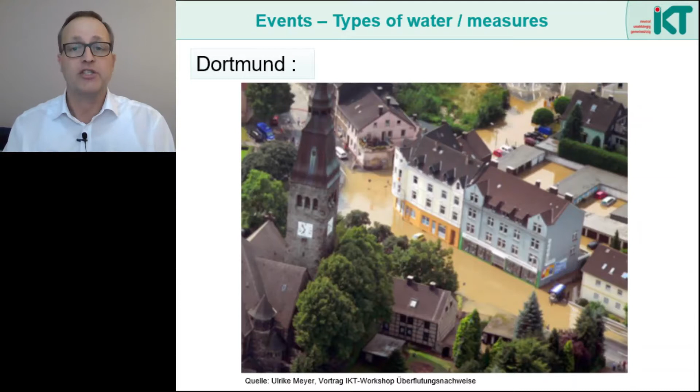From this, the Urban Drainage Department drew its conclusions and launched a major information campaign to inform citizens on the subject of backwater and property protection. This included citizens' events, flyers, and also explanatory videos in which the topic of backwater and backwater protection is explained in detail.

The conclusion here for us is, even though everyone was talking about floods and inundation, the event was in many areas just a backwater event. So a normal operating case that, with the right technical means, does not have to lead to major damage.

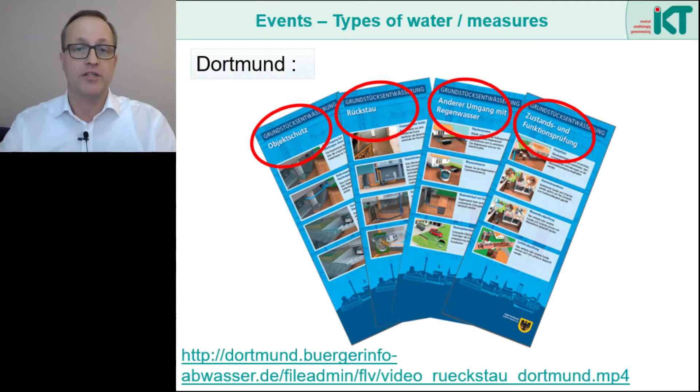The situation was different in the city of Münster. In 2014, heavy rain fell here with an intensity that had not been measured in Germany before. In 7 hours, almost 300 millimeters of precipitation fell in one part of the city, while other districts were hardly or not at all affected.

A thunderstorm cell had settled in windless conditions and rained over a single part of the city. A few hours later, another thunderstorm cell followed, which again rained over the same part of the city. All in all, this was an extremely rare event that caused considerable damage.

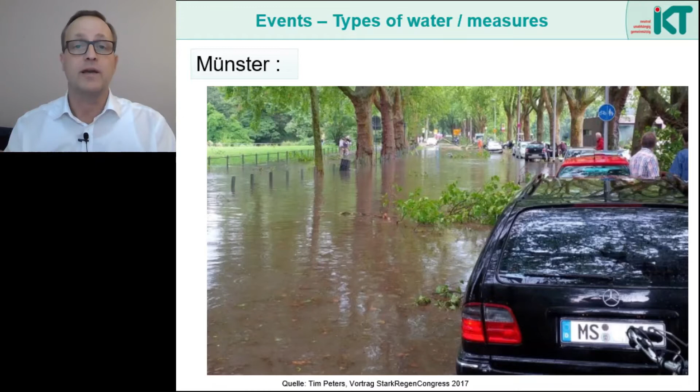In this case, the affected part of the city received far more rain than any underground drainage system is designed to take. The streets were flooded, and the water also carried branches and other floating debris, which then blocked roads and paths. In such a case, the drainage system cannot solve the problem of flooding. However, it must still perform its task reliably and not become an additional problem itself.

We can see an example in this picture. Such a passage barrier in a drainage ditch also unintentionally acts like a screen. If during a heavy rainfall event branches and other debris are carried along by the water masses, they are held back here and the drainage cross-section is blocked.

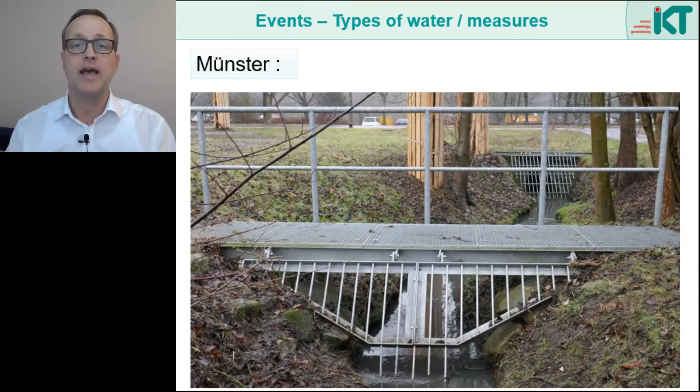Eventually the system fails and backwater occurs. In the city of Münster, such passage barriers were therefore later dismantled and replaced by fencing around the site.

Here we see another case, again with a different water management background. The small town of Braunsbach in Baden-Württemberg was overrun by a wave of mud. The water was up to the second floor of the houses. There had been extreme rain in this mountainous region. There was also a period of calm winds, so the rain fell over a long period of time in a

single area. Then the water flowed down the hillside and followed two small streams that converged in the town of Braunsbach. In addition, there were landslides, so that earth dams formed in the streams, which later suddenly collapsed under the water pressure. Large masses of water then flowed into the town at high velocities and with a lot of debris and rubble.

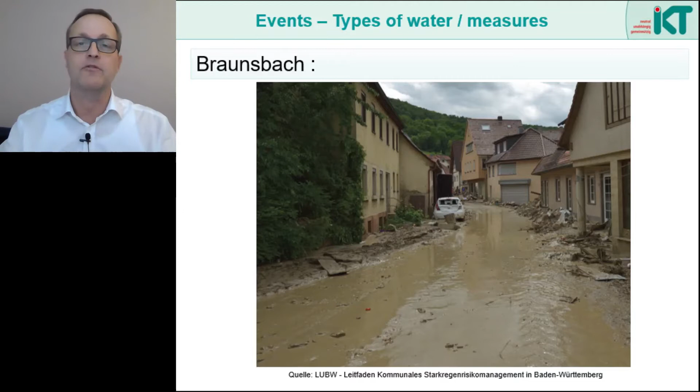Here we see the result in a different place. So here it was not the rain in the town itself that became a problem, but the water flowing in from other areas outside the town.

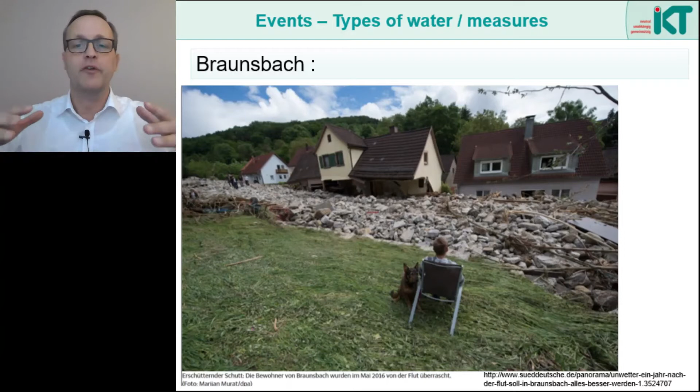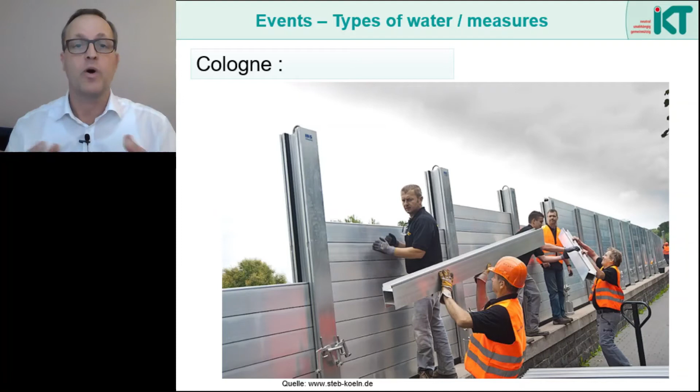The last example comes from Cologne, also in Germany. Cologne is located on the Rhine, one of the largest rivers in Europe. Here, flood protection is of great importance. In this picture, we see how a mobile flood protection wall is being built. In the past, Cologne was often affected by floods that inundated large parts of the city area. So during floods, a large river overflows its banks. The water then comes from the entire catchment area of the river.

Let me now systematize these examples a little. Usually we speak of an overload of the system when the sewage system can no longer carry away the rainwater. It is usually expected that frequent rainfalls and the dirt washed off with them can be cleaned safely. So the main purpose of the sewer system is to ensure that frequently occurring polluted water is disposed of properly. It is all about the quality of water.

In most cases, we are talking about return periods or recurrence periods X of a few years. Of course, the system has to function perfectly from a technical point of view. We remember the example from Dortmund, where the private connection pipes were not secured against backwater and the basements were flooded as a result. Flooding, in turn, means that the water causes damage on the surface. Here, the still acceptable return times Y are then significantly higher.

The precipitation covers different areas before it runs off on the surface. These can be unsealed or sealed surfaces, such as pavements or roads that lie within the area under consideration. In addition, however, rainwater can also be received from surfaces outside the area under consideration.

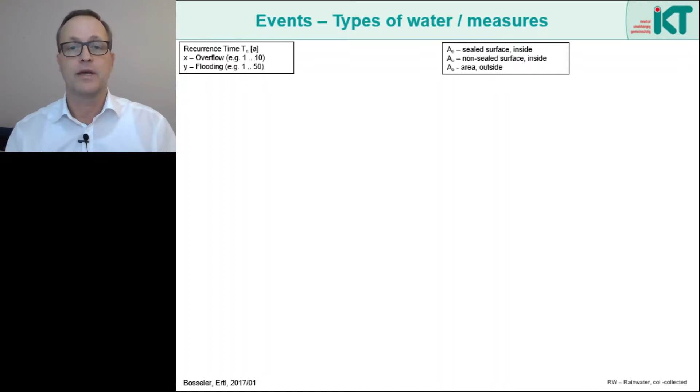The rainwater that occurs very frequently is then normally classified as wastewater. This is then collected separately or together with the used water. So the issue of quality is in the focus here. Some rainwater is also treated decentrally and can be infiltrated directly into the groundwater.

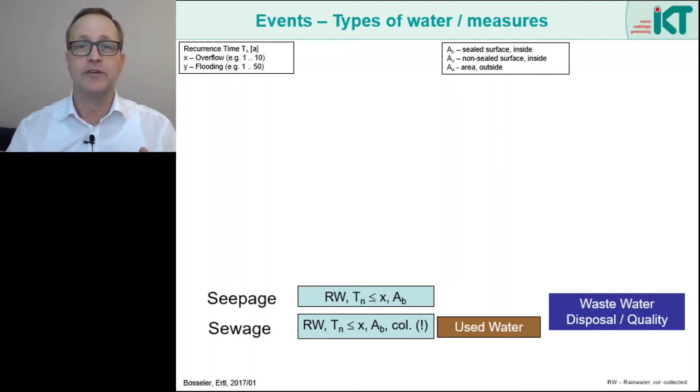In addition, there are also many other groundwater issues, but they are only listed here for the sake of completeness. For example, wastewater can exfiltrate from the leaking sewers, or groundwater can infiltrate into the sewers as extraneous water. But we want to look at rainwater here.

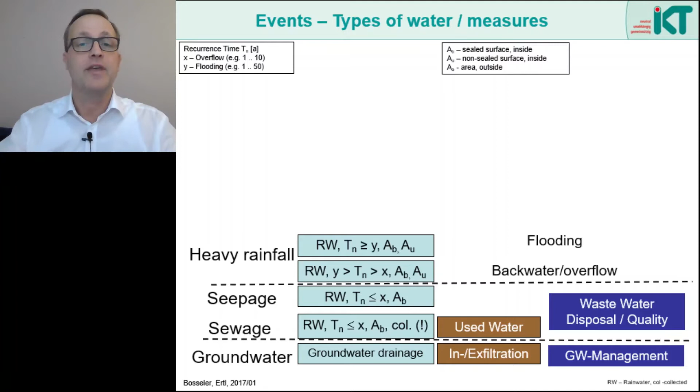After all, according to plan, infrequent, heavy rainfall is no longer collected and drained in the sewage system. As a result, the sewage system can become overloaded and result in an overflow. Or, in even fewer cases, the area may be flooded. The main problem here is that we are talking about very large masses of water that can definitely no longer be discharged via the sewer. We have seen this in the case of the city of Münster.

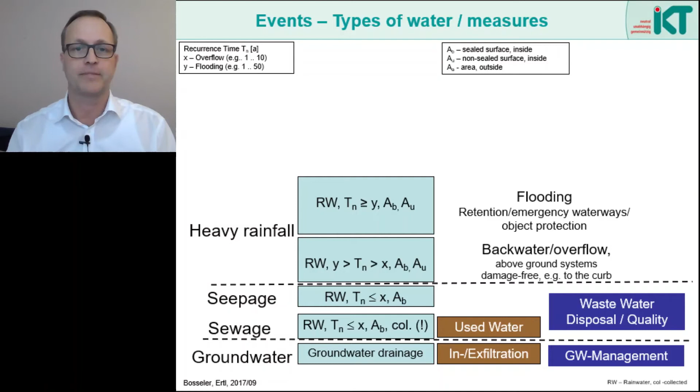Other measures are needed here. This applies in particular to the construction of above-ground systems for control, retention, and also the protection of objects. In addition, further measures are necessary in special cases. This concerns the construction of barriers, retention and guidance elements to prevent water from other areas from entering. We remember the example of the small town of Braunsbach.

Or, of course, the protection against floods from a large body of water, such as the Rhine in Cologne. All these tasks are about runoff and flow management. That means primarily a question of quantity. We need to know how to retain and steer large amounts of water so that they do not cause damage.

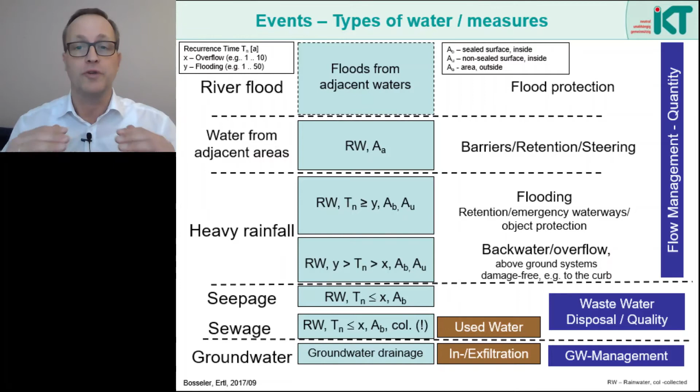Let me summarize once again. The sewerage system serves to solve the quality issue. That means, how can we treat the pollutants that occur during frequent rainfall? The quantity issue then concerns the very infrequent but heavier rainfall. Here it is a question of controlling the heavy rainfall on the surface through suitable retention and control measures so that no damage occurs. Now, this brings me to my second point.

How do we deal with this situation now? What positions are there and who is responsible at the municipal level, purely legally, and what is technically appropriate? Here it is worth taking a look at the European standard on urban drainage. 3 levels are distinguished: the water management system, the urban drainage system, and the actual drain and sewer system, that is, the system of wastewater pipes. There are then different responsibilities for the different levels, namely for water associations, municipalities, and the wastewater companies.

How the individual levels are interrelated is summarized in section 5.2.1 of the standard. Quote, drain and sewer systems are part of the urban drainage system. Urban drainage systems comprise all infrastructures for the management of wastewater and rainwater in the built environment. The extent and role of the drain and sewer system within the urban drainage system depends on local circumstances for each system. Urban drainage systems are part of a wider system of water management.

The urban drainage system is then explicitly defined in section 3.17 as infrastructure for the management of wastewater and runoff in the built environment. In essence, all this corresponds to our classification of the different types of water. Wastewater is a quality issue, and this is solved by the wastewater company. The municipality, on the other hand, is responsible for all flooding issues that arise on its territory. Water associations, on the other hand, take care of high-level regional water issues that have to be solved in the river basin as a whole, for example.

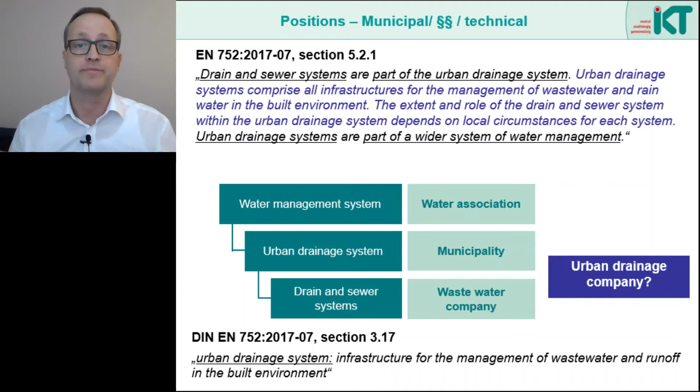In the public perception, however, this distinction is not always clear. This is especially true when the wastewater company calls itself the urban drainage company. In this case, citizens naturally assume that an urban drainage company is actually responsible for urban drainage, and so also for surface runoff. However, this is precisely not what a wastewater company does. Against this background, 5 guiding principles for the role of urban drainage companies were formulated by KomNet Abwasser in Germany. KomNet Abwasser is a network of more than 60 municipal network operators organized by the IKT, in which the IKT offers a wide range of services, including on the topic of heavy rainfall.

So, the guiding principles are: number 1, the sewer is part of the drainage system. The sewer serves to collect polluted water, that means also frequent rain runoff from paved areas, in order to convey it to a purification system. In addition, other facilities must be provided on the surface to cope with infrequent but all the more heavy rainfall.

Number 2, the sewer function must be safeguarded, especially during weather extremes. The sewage system cannot solve the heavy rain problem, but it must not become an additional problem itself. We remember the example from Münster, where some passage barriers in the system acted as screens and were blocked with branches and floating debris.

Number 3, of course, the urban drainage company is a key player when it comes to assessing the heavy rain problem. Even if it does not plan, finance, and implement all the measures on the surface, it can, of course, support the municipality in the performance of its tasks.

Then number 4, this support of the municipality includes, for example, identifying risks. Based on hydrological and hydraulic calculations, risk areas can be identified and also solutions to manage and direct the water flow. Yes, and finally, citizen information. This task concerns in particular education about the necessity and possible measures for object protection on private property.

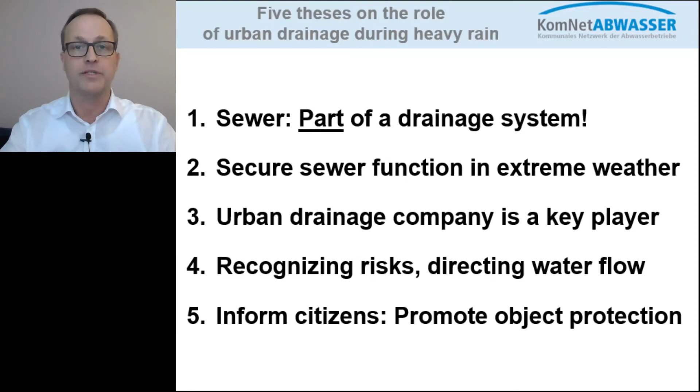Another interesting aspect is the information provided to politicians. Heavy rainfall events are often discussed together with the topic of climate change. Many municipalities have even committed themselves to the Paris Agreement. And that's where it's worth asking: what does the Paris Agreement mean in detail? Let's look at the most important article of the Paris Agreement, which is Article 2.

There, under A, we find the goal that is most discussed in public, which is to limit the rise in temperature. Now, as an individual municipality and an individual urban drainage company, we can, of course, only make a small contribution to this. More interesting is point B. There it says, increasing the ability to adapt to the adverse impacts of climate change and foster climate resilience.

And this, of course, relates precisely to the municipal measures for heavy rainfall protection that we have just been talking about. Precautionary measures against heavy rainfall are precisely an increase in the ability to adapt to the adverse impacts of climate change. In particular, this fosters climate resilience. So, if a municipality feels committed to the Paris Agreement, then that is definitely also a commitment to heavy rainfall protection. And of course, this will only be successful if the financial means are made available.

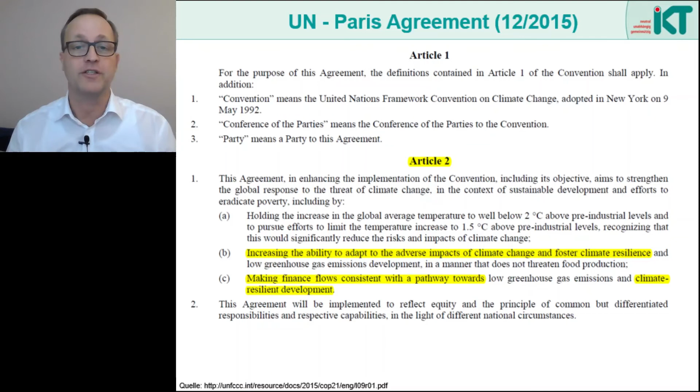And that is precisely the request of point C in this article, which says making finance flows consistent with the pathway towards climate resilient development. So, those who want to take precautions against heavy rainfall should take municipal councillors at their word if they are committed to the Paris Agreement. Heavy rainfall protection is an improvement in climate resilience, and the financial resources should also be made available.

And that brings me to the solutions. Here, of course, there's a great variety of services offered by engineering firms and construction companies. It starts with heavy rain hazard maps and goes all the way to object protection on private properties. In closing this presentation, I would just like to mention what we are currently preparing at the IKT in terms of research and testing activities, because a lot is happening in this area as well.

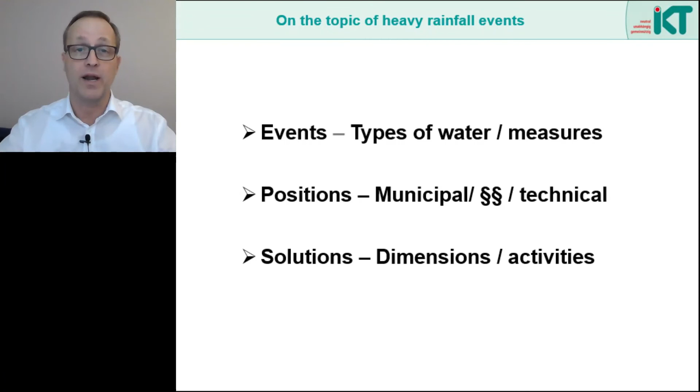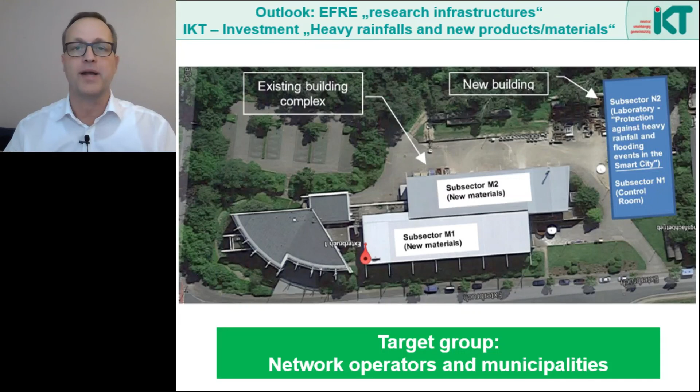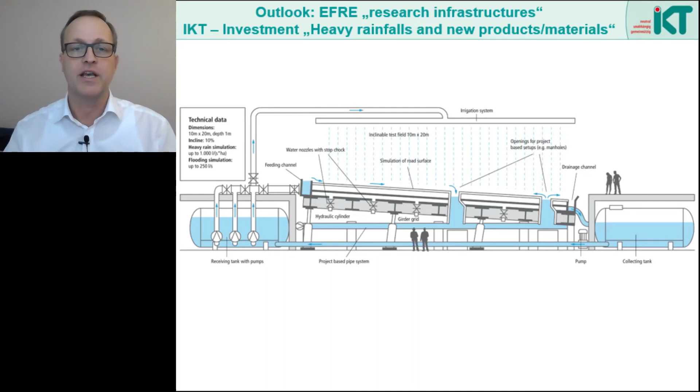Typical research questions then concern, for example, the interaction between surface and sewer network, facilities for infiltration of rainwater, multifunctional areas such as playgrounds where rainwater is also stored and infiltrated, and many other stormwater management facilities such as, for example, green roofs. The role of our partners, especially the urban drainage companies, is then to identify the problems for which we should investigate and test the technical solutions. Typically, we do this in joint projects with several network operators.